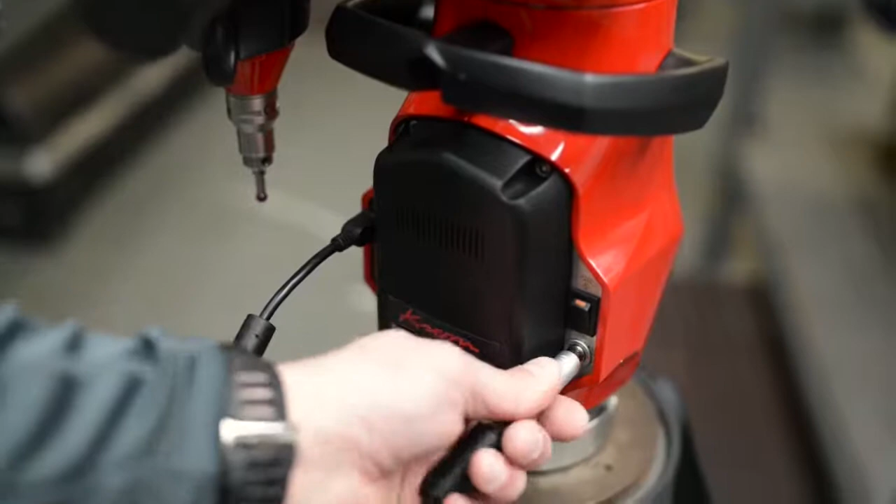Okay, so we're gonna plug in the arm into the computer. We're gonna do this via USB. When you install the drivers for this arm, there is an arm wizard that we'll go into to connect. So we're gonna double click on it and we're gonna hit connect.

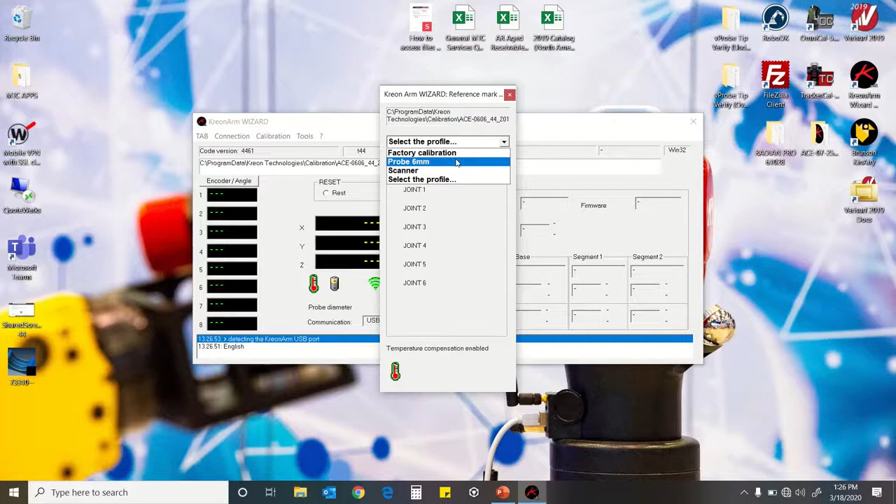Then it's gonna ask us what profile to select. So we're gonna just deal with the probing aspect. So I'm gonna say probe. Now it's asking us to unstow the arm to exercise each encoder. So as we move it, we can tell it's checking it off, and then finally the additional scanner axis. So now the arm wizard is reading out. We see numbers running. We're basically connected to it.

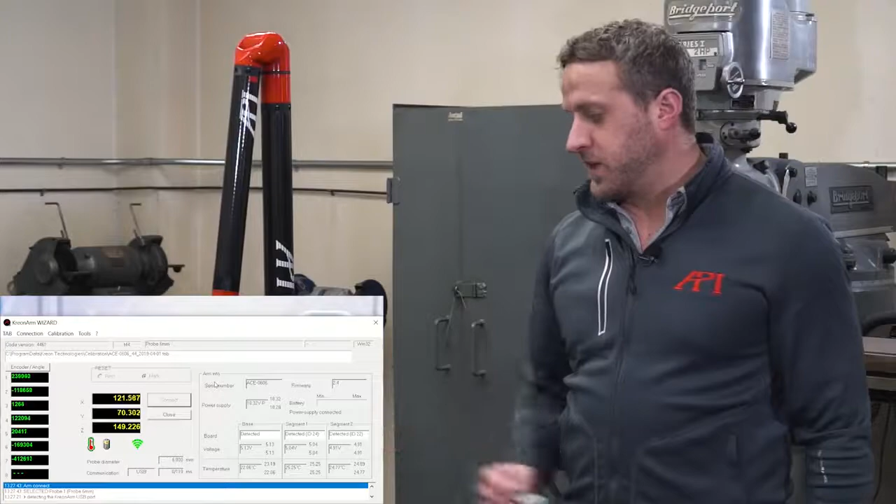From here, we can go into the calibration, probes management. So this screen is basically where we can add new probes or modify the existing probe. What we're gonna do is we're gonna modify it by adding a calibration.

So in the kit that I was telling you about comes the drivers, comes all the tools to be able to install it to a base, installs the key system for the probe, and it also includes 2 spheres since we're using the scanner with it. This sphere is the one that we're going to use for the calibration of the probe.

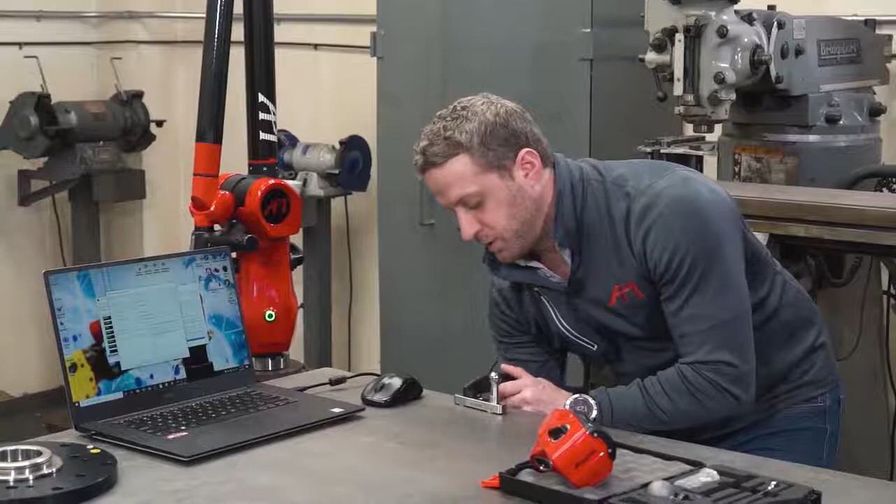So the process would be to fixture it down to your table. This can be done with a clamp or hot glue. Just any way where it won't move. And then right here in the probe management, it asks us to put the qualifying sphere diameter. And it says it right on the side of here. So we already have it in there. It's 20.0019 millimeters. And then it's asking us to take at least 15 points.

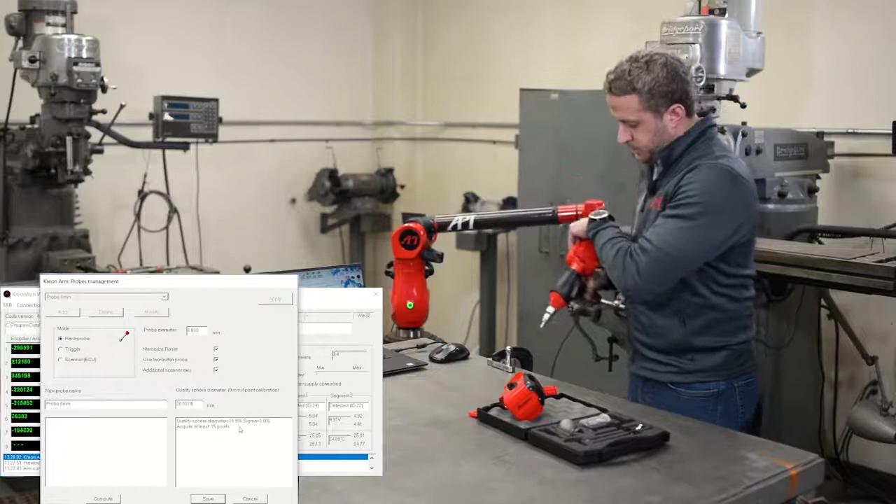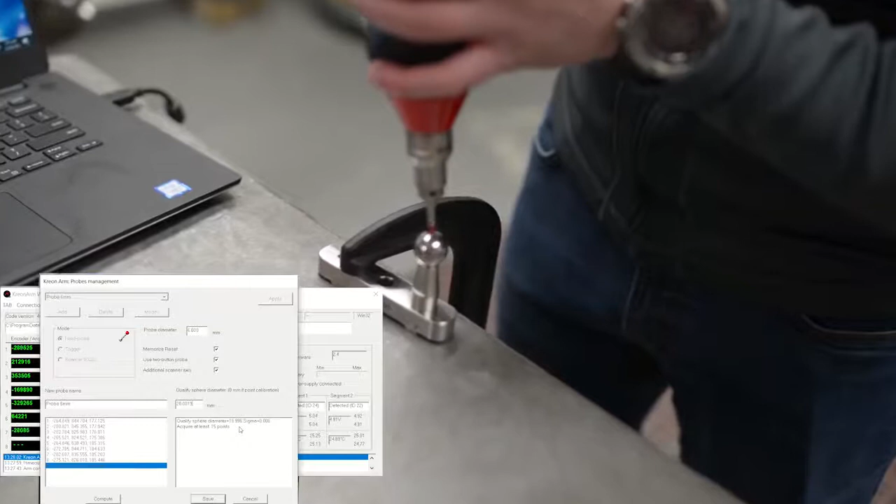So I'm gonna unstow the arm. And I like to do 4 around the widest part of the sphere, 4 around the upper part of the hemisphere, and then 1 right on top. I'm gonna position the arm differently and do that again. And then maybe 1 in this orientation. When we're done, we stow the arm and we hit compute.

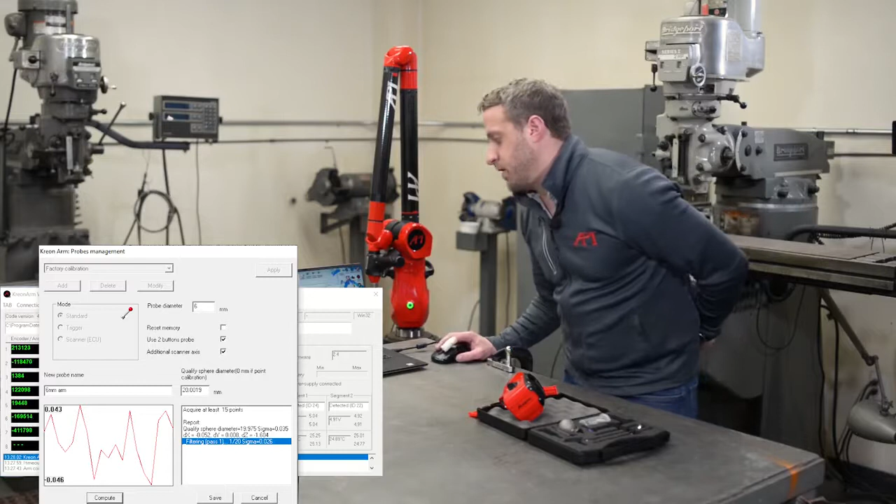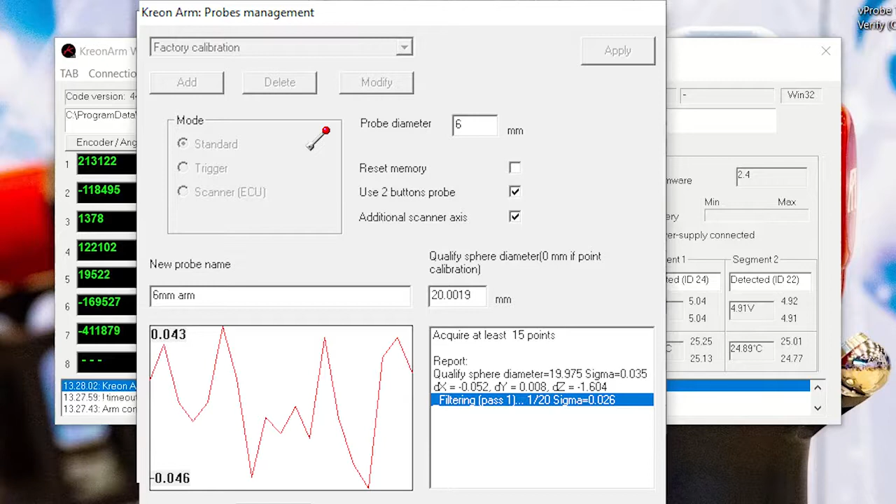This screen will give us an upper and lower point graph. It'll also tell us the sphere diameter that it had calculated. And it'll give us a sigma rating or the deviation from the nominal sphere diameter. So we're at 26 microns. That's within the 27 micron calibration standard. So we're gonna hit save and apply.

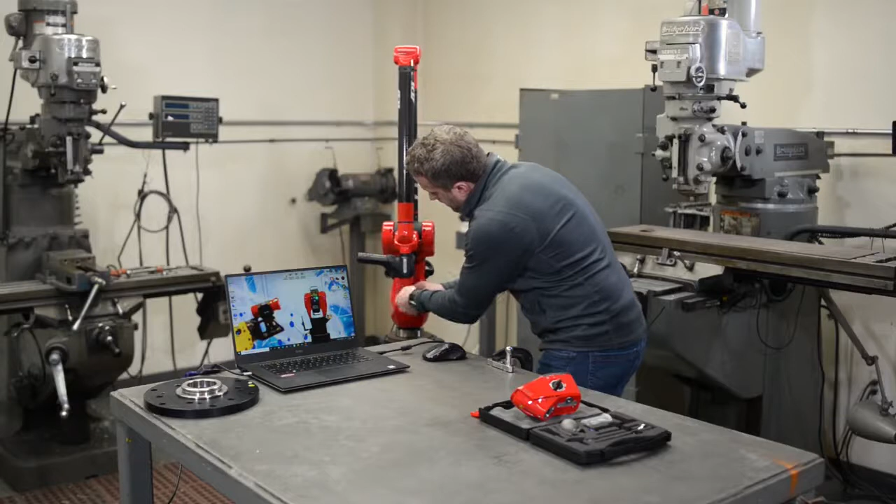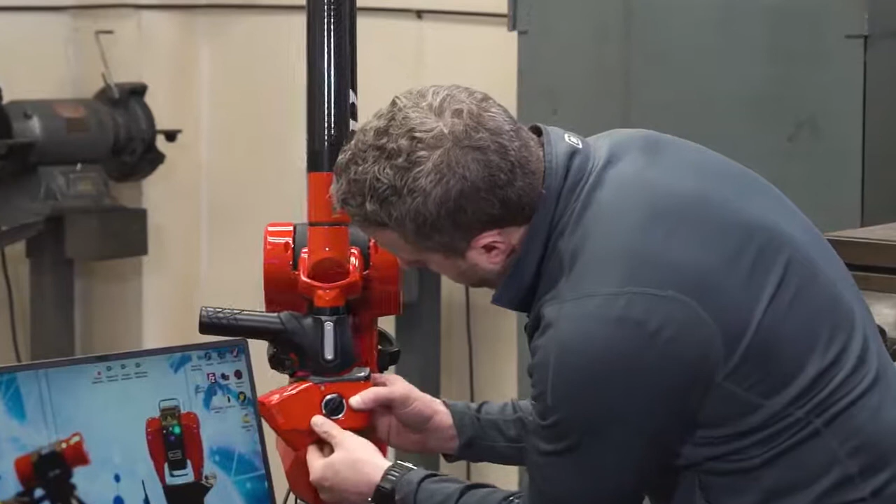Now that I described how to calibrate the probe inside of the arm wizard, I'm gonna demonstrate how to install the scanner and do a calibration on that. When you go from switching between the scanner and the probe, you should shut off the arm. Then we're gonna take our key. We're gonna remove the probe. We're gonna grab our scanner, put it in unlocked mode, place it on, lock it on, and turn the arm back on.

So again, the arm is connected through the Ethernet port. During the installation process, the drivers will configure your Ethernet adapter to connect automatically. So I'm actually gonna go through the calibration process in the third-party software, and then I will install the probe on it and we'll go through a calibration with that. So for this sake, I'm gonna be using VeriSurf.

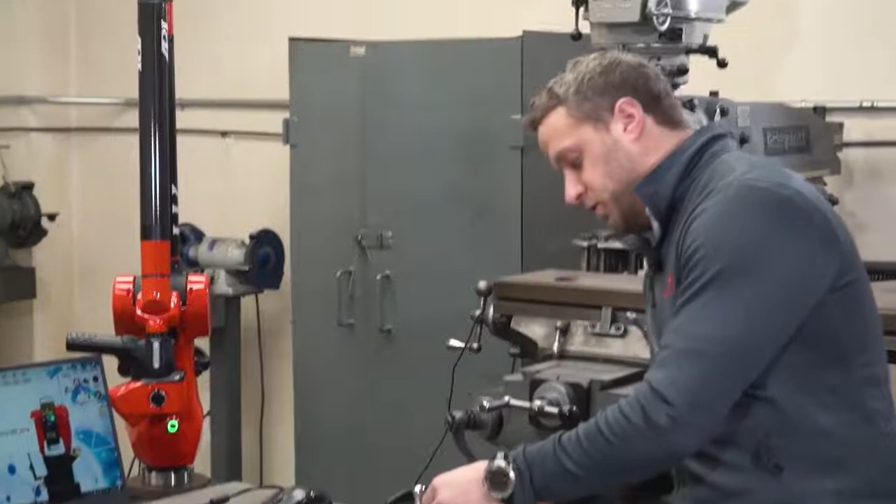Also, while that's firing up, I'm gonna take my tool and I'm going to remove the sphere that we use to calibrate the probe. And we're gonna install the matte looking sphere. So the scanner needs a different type of sphere because the reflectivity of the other sphere messes with the calibration results. So this sphere was specifically manufactured for the calibration of this scanner.

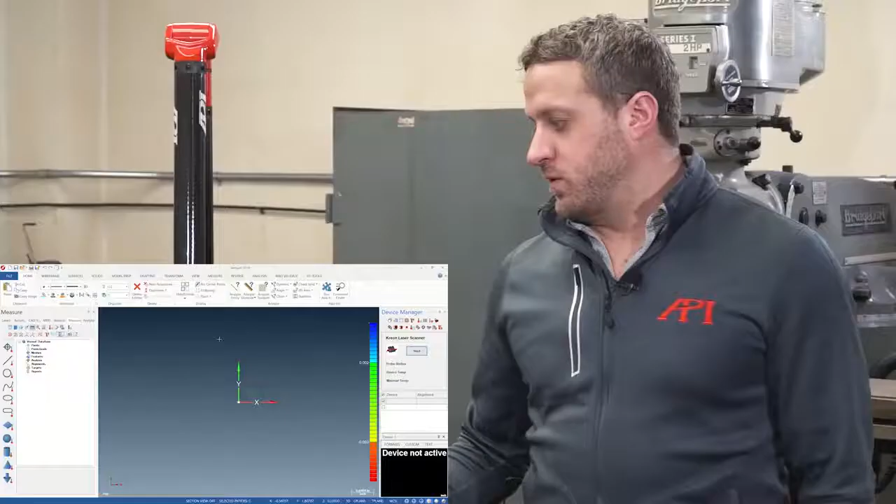When we open the device manager in VeriSurf, we're gonna be on the laser scanner device. We're gonna hit start. It's going to ask us to select the profile. We're going to select scanner.

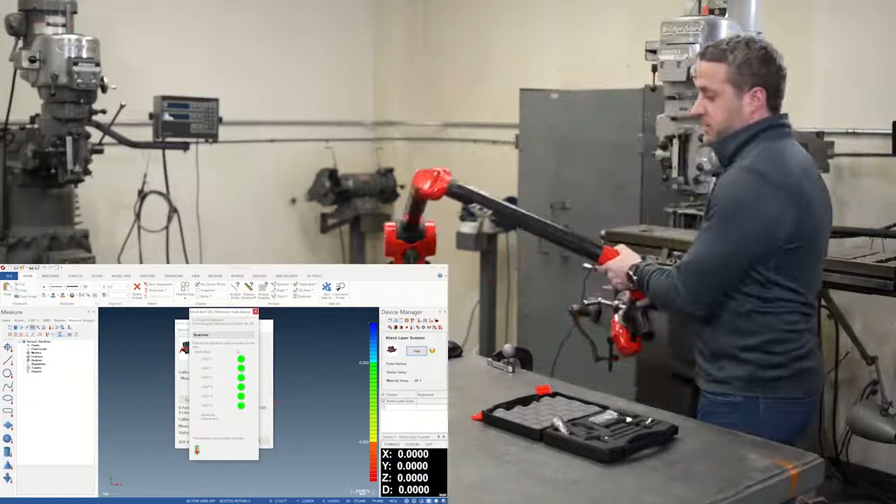Again, we're going to unstow it and exercise each axis, including the scanner axis. And now we are connected. So now that the arm is started, in our device controls, we're going to hit the calibration button. I have a previous scan in there, so I'm going to delete it out.

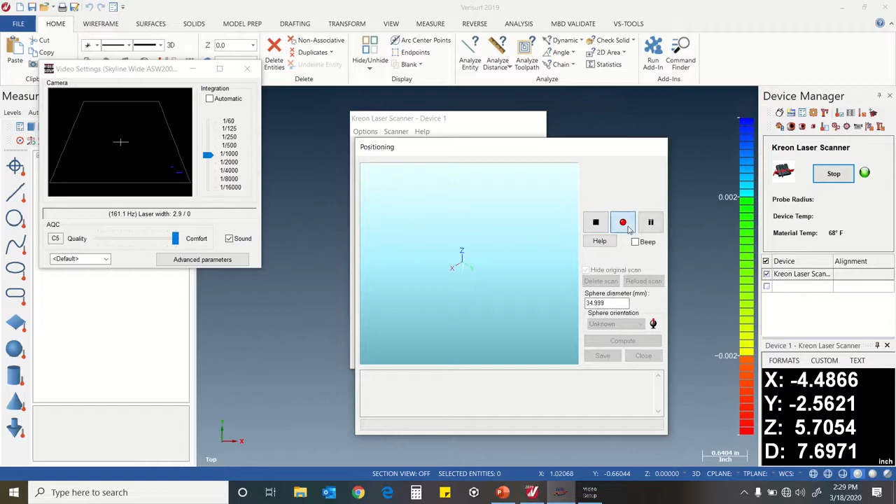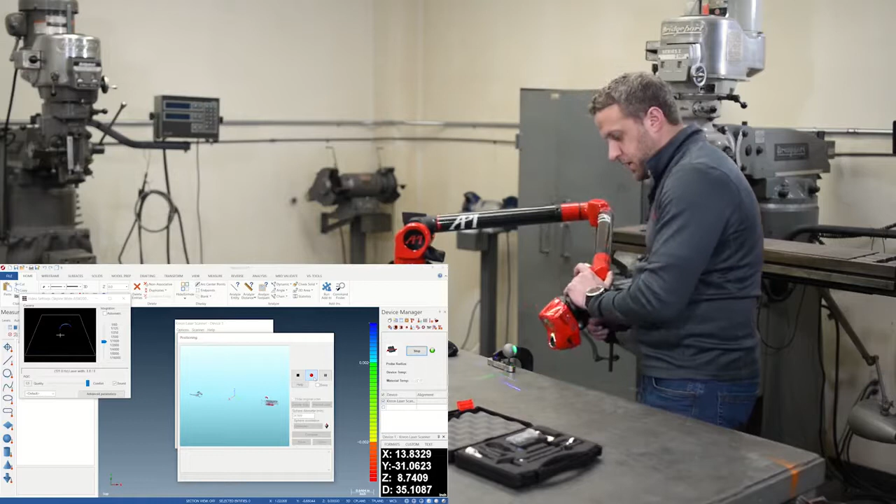And then it asks us here to put in the nominal diameter of the sphere, which is written on the side. That's 34.999 millimeters. When we're ready to record, we're going to hit the record button. And then we're going to trigger to gather data. So on the screen, the active scan will be colored red, and the gray portion is a previous scan.

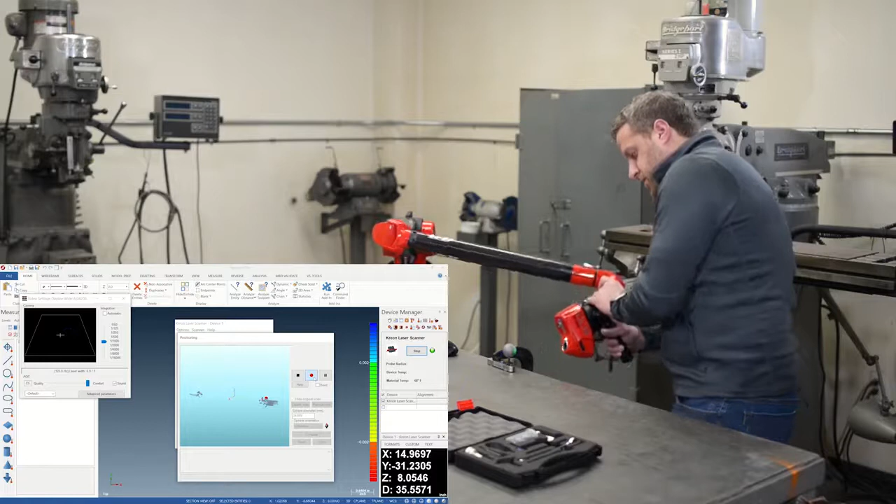So it doesn't matter if you take some bad data like on the table or the clamp in this case, it's going to do a filtering later and pull out the sphere. So we're going to put the arm in different orientations. We're going to try to cover as much as we can. When we're done, we'll stow the arm, we'll press stop, and we'll hit compute.

So right now it's filtering out a lot of the flyer data, table, clamp, and it's trying to pull out that sphere, and it's going to calculate it and give us our results of the calibration. So after it computes the sphere, you can see that it pulled out quite a bit of the sphere. We can zoom in, you can see what kind of data it collected.

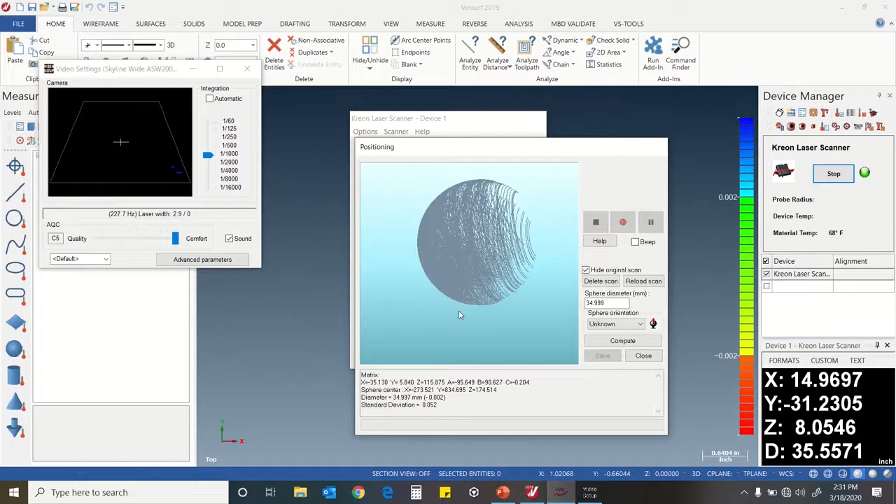Below, we are getting the diameter of 34.997. So it's 2 microns below what the nominal diameter is. Really good. So from here, we're going to hit save. Now it's saving all that spec information inside the arm. We're going to hit close, and we're ready to go with the scanner.

So now I'm going to demonstrate installing the probe onto the scanner, and then we're going to calibrate that as well. So I'll take the probe that I had before. I'll take my removal tool. I'll unscrew it. Then I'm just going to take the scanner off so you can see it better. So on the bottom, we're going to screw the probe into there. Use the tool to just tighten it down.

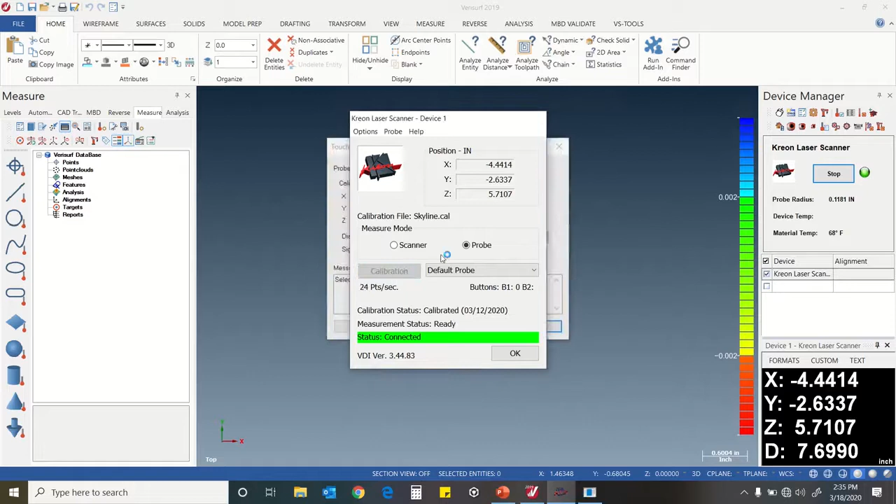So now that we have the probe installed, and this is kind of a shorter probe, but you can put longer ones on it. The longer probe that you install on it, you'll notice you'll probably get less of a tight calibration on it. We're going to switch over to probe. Then I'm going to hit calibration. So I can actually put in by sphere. So I'll put in this sphere, 34.999, and I'll hit start.

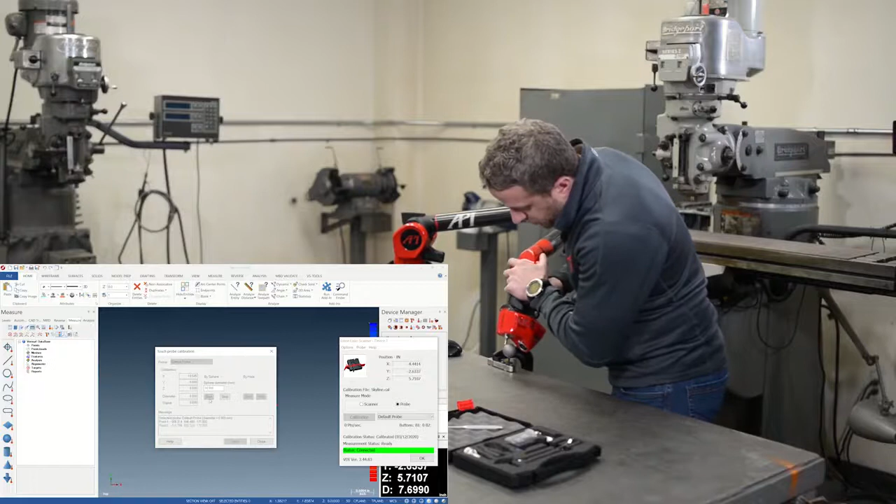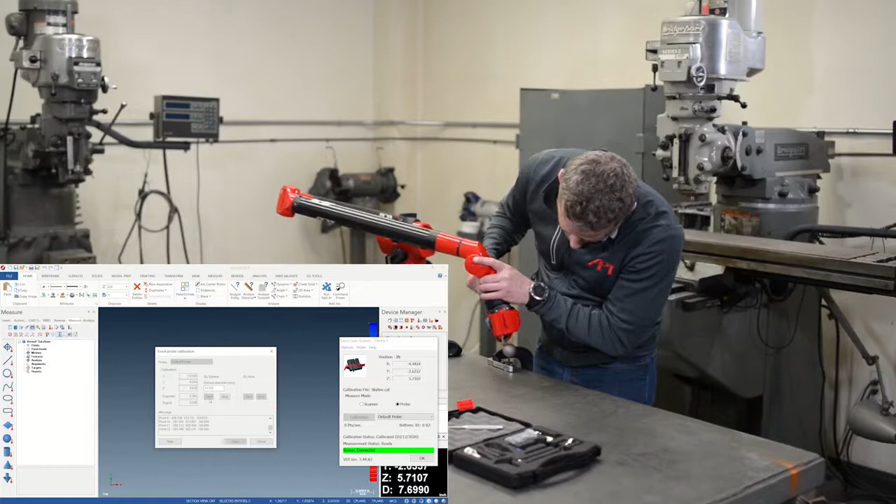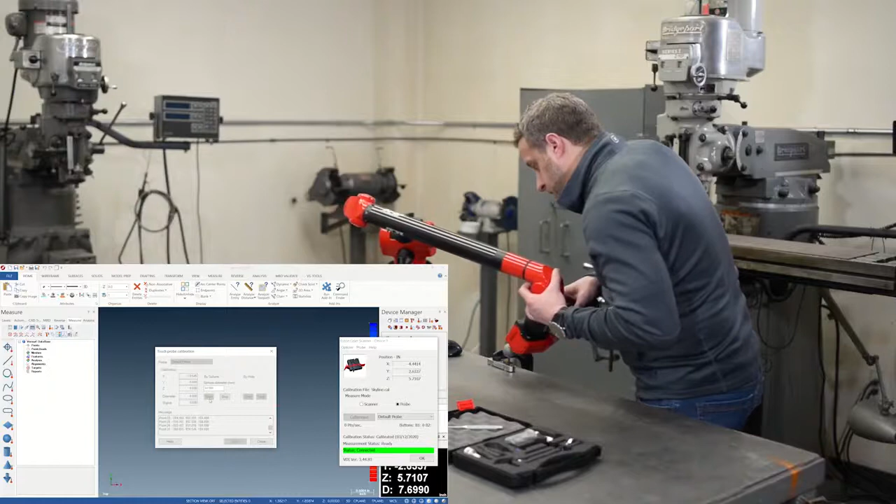I'm going to unstow it, and I'm going to take points similar to how I took them with the probe and the chrome sphere. So 4 points around the big part of the sphere, 4 around the upper hemisphere, 1 on top. Change the orientation. And when you're done, I'm going to hit stop. And it's gonna give us our diameter.

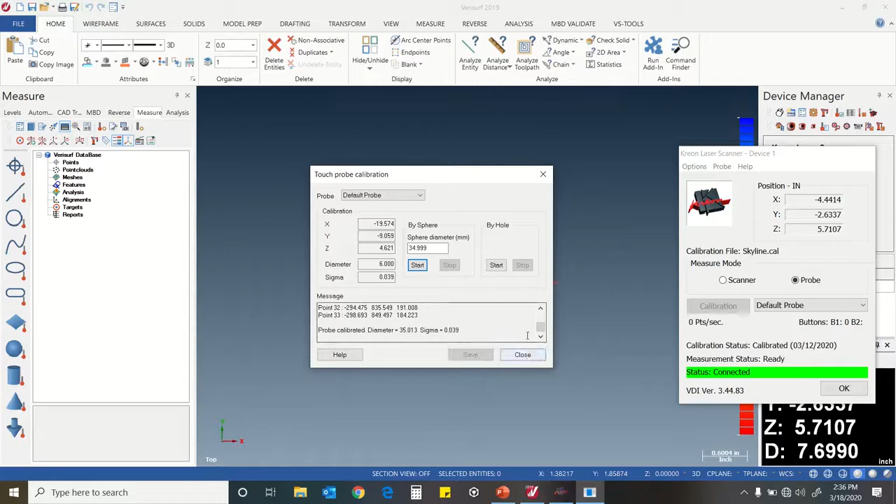We have 35.013, so roughly 14 microns above the nominal diameter of the calibration sphere, so it was good. So I'm gonna hit save, close. So now we have a calibrated scanner, we have a calibrated probe.

Next, we're gonna throw a part on the table, and we'll use the scanner and the probe to demonstrate how to use the arm for alignment, scanning profile surfaces, grabbing some prismatic features like a circle or some planes.